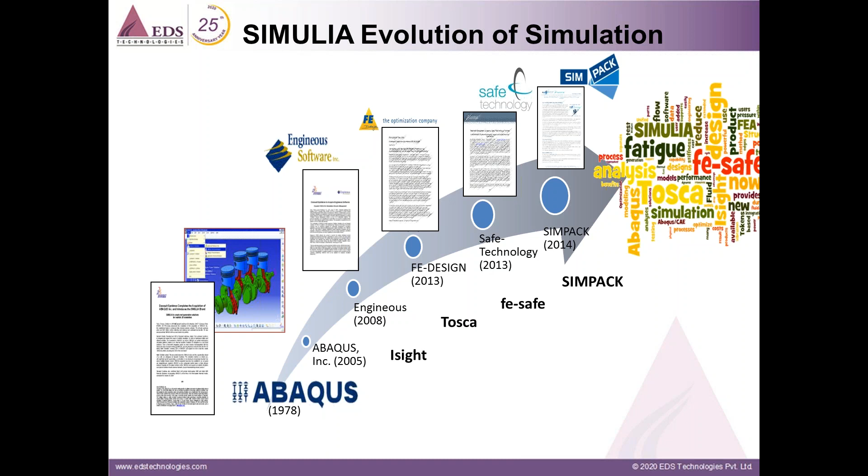Over time, Dassault Systèmes has acquired companies like Isight, Tosca, fe-safe, Simpack, and so on. As the years go by, Dassault Systems is acquiring many simulation software products especially, and making them products under the SIMULIA brand.

Let me begin by introducing SIMULIA. SIMULIA is a Dassault Systems brand that focuses on realistic simulation and is very strong and well positioned to deliver the benefits of realistic simulation technology for the long term to the global user community. It makes virtual testing a standard business practice that improves product performance, reduces physical prototypes, and drives innovation.

Simulia has different ways of licensing its products. For example, right now if you're using a portfolio package or analysis package, it will give you access to Abaqus only. In case you want to use Isight or fe-safe or Tosca, you should have extended packaging. So that's what we're talking about here.

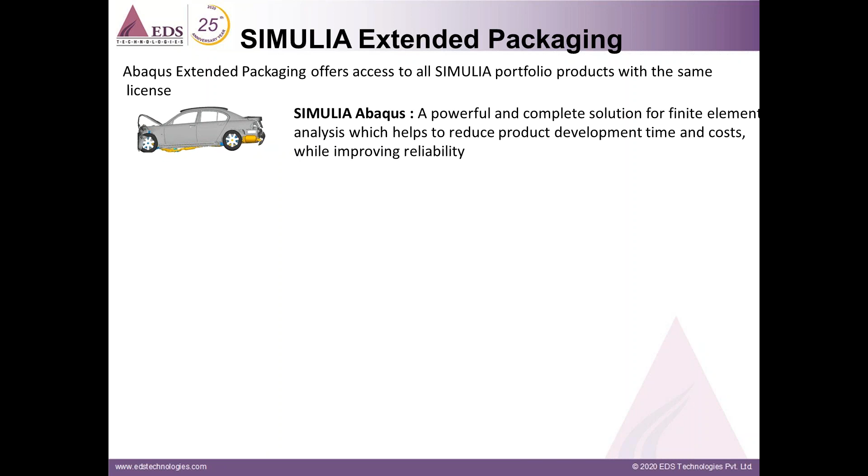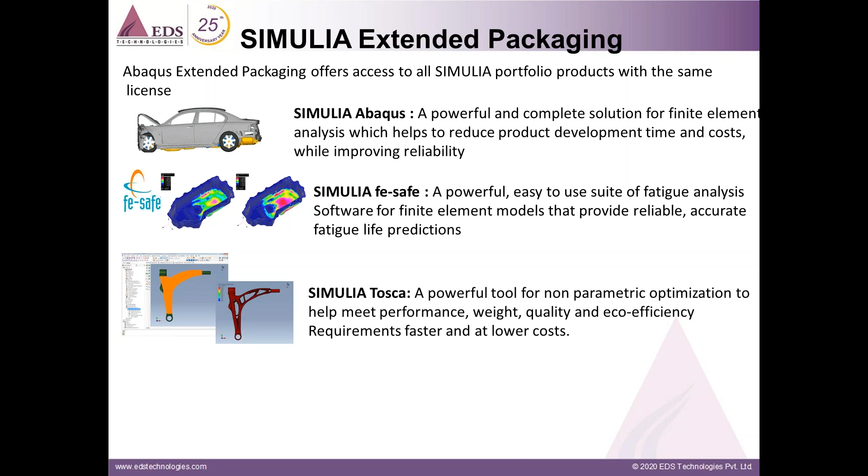First we have Simulia Abaqus, which everyone is probably very familiar with - it's a general purpose finite element software. Then we have FESafe, which is a fatigue calculation solver. Then we have Tosca, which is a non-parametric optimizer. Then we have iSight, which does parametric optimization, but also process automation and many statistical type things. These four softwares together make up the extended packaging.

The intent for Simulia is to have a comprehensive suite of software that will meet all the engineering challenges for a broad range of customers.

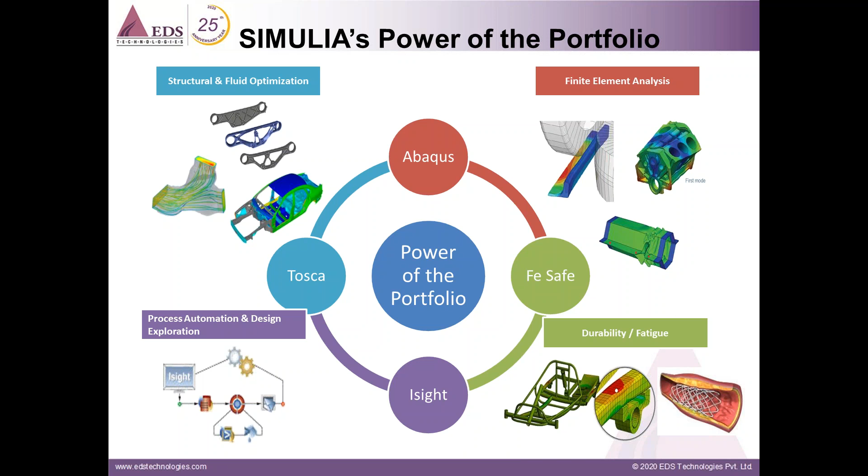Fundamentally, what the software actually does is complement each other depending on your workflow and your products. You may want to use all of them or a couple of them. For example, if you want to do finite element analysis with fatigue, we use Abaqus and FESafe. Finite element analysis and optimization - we have Abaqus, Tosca, and iSight. Or if you want to do automation of your established workflow using iSight, that can be done using Abaqus and iSight.

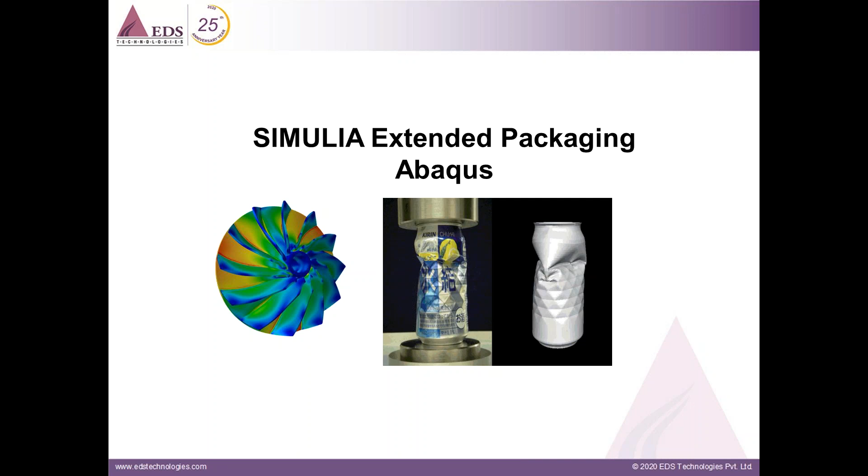First I'll start with Abaqus. I know you're already users of Abaqus, but I want to give some background terminology on a few different products available within the Abaqus portfolio, like solvers and so on.

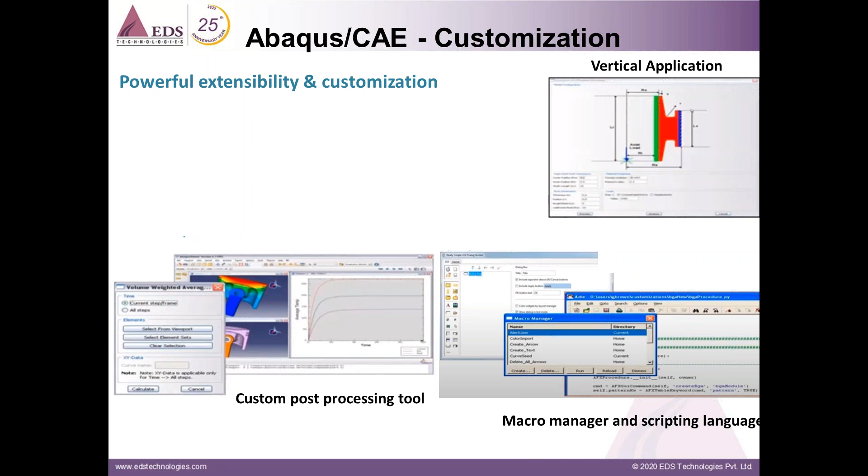In terms of customization, when you're working in Abaqus CAE for pre-processing or post-processing, behind the scenes it's writing journal files or replay files using the Python scripting language, which you can use to build your own scripts. There's also an option within Abaqus CAE to create a macro, which copies the operations you're doing continuously. It's not like writing text and using it - it's like recording a video and using the same video for operations on another model.

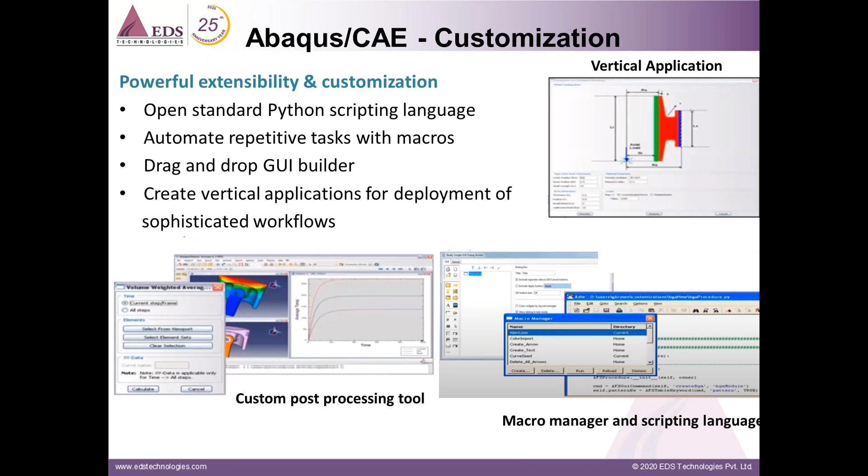We also have a drag and drop GUI builder within Abaqus CAE, where you can build your own interface based on your application. On the top right hand side you can see a vertical application - it's a great deal of customization you can do within CAE.

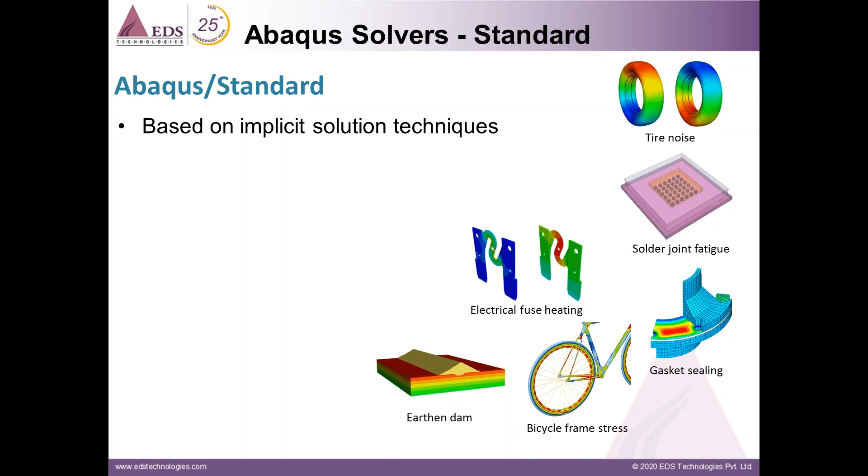Moving on to solver capability, we have two strong solvers within Abaqus that you're already aware of - standard and explicit. Standard is based on implicit solution techniques, typically used in static, quasi-static types of problems, thermal, linear and non-linear analysis, and so on. It's intended to be the solver used for most applicable components or products across a broad range of problems.

We also have what we refer to as a multi-physics procedure, where we couple physics procedures such as thermal and stress, or dynamic stress and displacement. We can also do acoustic analysis, and we have EMAG capability within the standard solver.

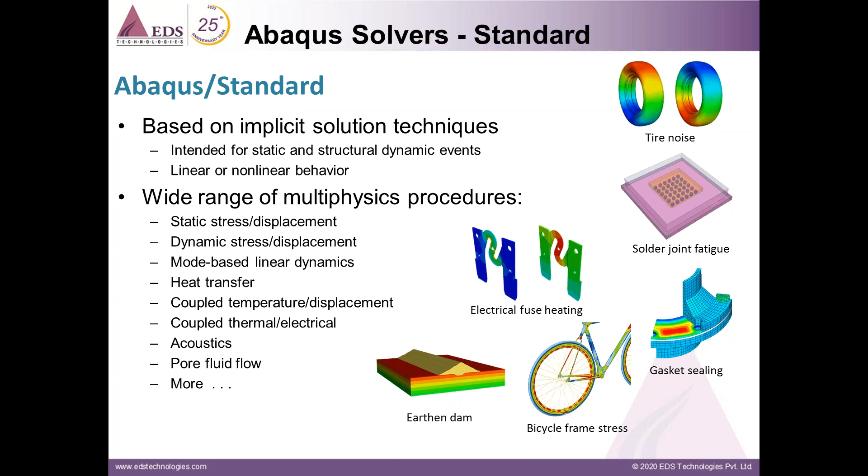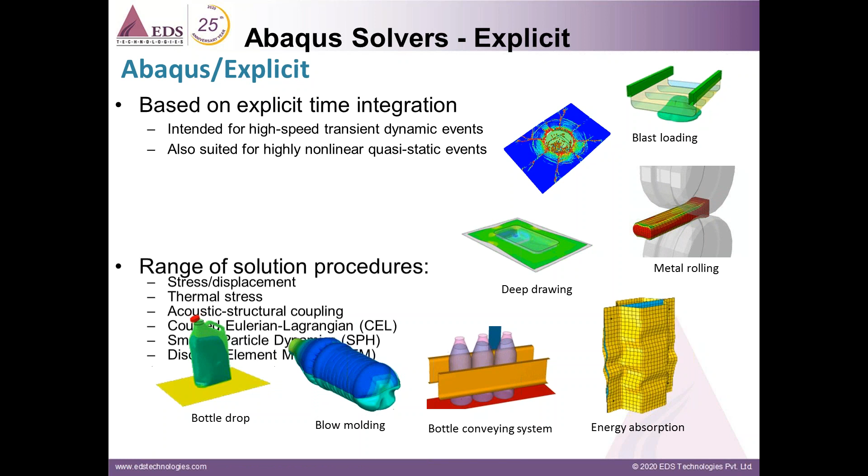Explicit is typically used for dynamic types of things - its main focus is on high-speed transient dynamic events, such as car crash, ballistic impact, or blast. There are additional features within the explicit solver quite useful for a limited subset of problems, such as CEL, SPH, or DEM, which are used in situations where excessive deformation of the mesh is happening.

Going into more detail, you have two different meshing techniques - Lagrangian and Eulerian. Lagrangian is where deformation follows the mesh, whereas in Eulerian we have a static mesh that tracks the displacement and deformations through the mesh. Its applicability comes in problems with extreme deformation, or you can combine Lagrangian and Eulerian together for analysis like airbag deployment, vehicle entering water, blast analysis, or tire hydroplaning.

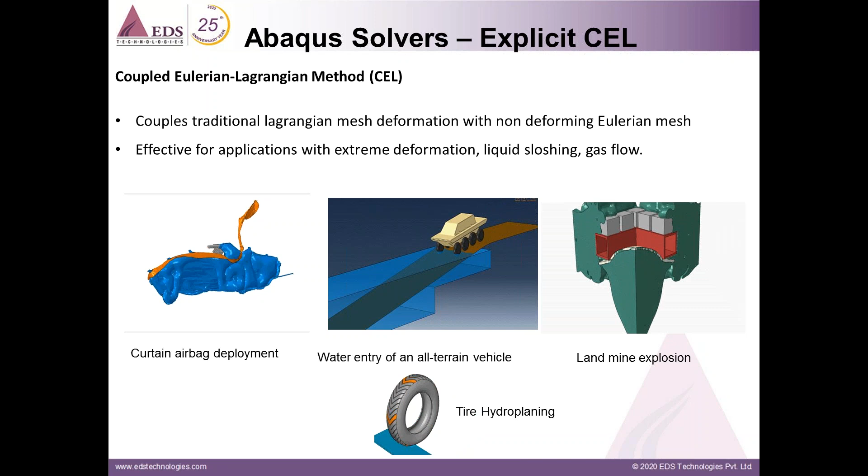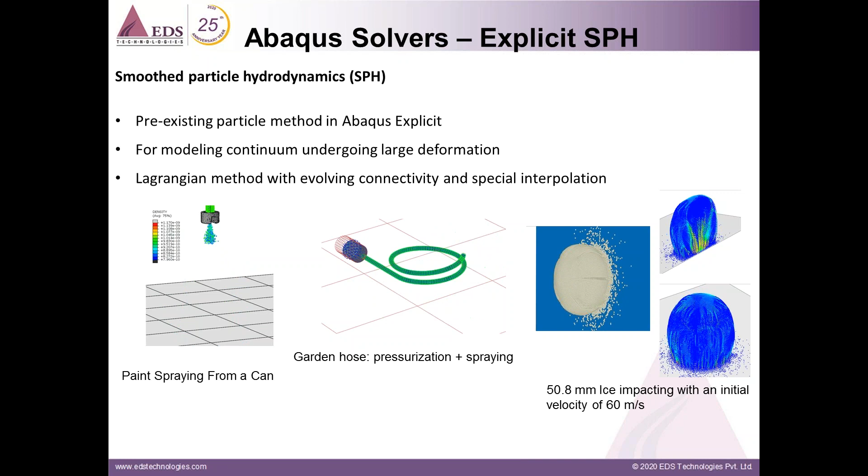Then the other one is SPH. This is essentially where we have particles embedded inside an element, and when the element hits a failure criteria or time-based criteria, the element breaks into these particles. These are good examples of what we have here on the screen.

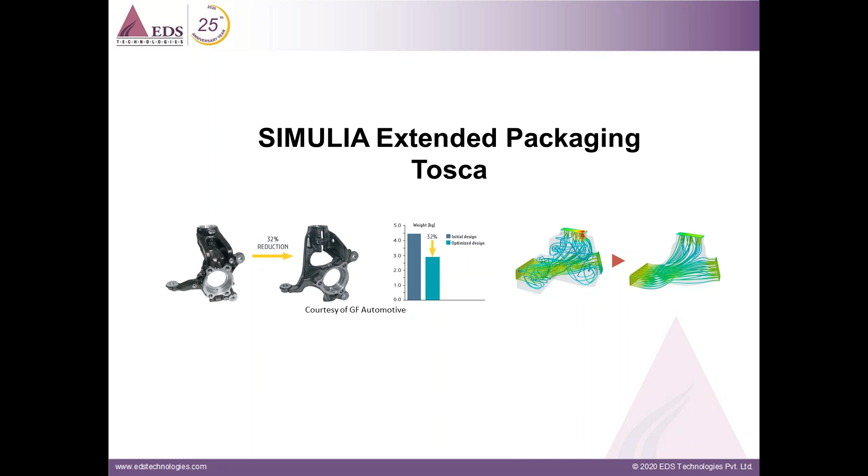That was a brief overview of Abaqus. Now I'm going to talk about Tosca. Before getting into details, there are two different methods to approach optimization - non-parametric optimization and parametric optimization. Tosca uses non-parametric, and Isight uses parametric. There are many other things, but when it does optimization, it uses the parametric method.

The difference between the two is - when I talk about parametric optimization, the parameters are things like, for example in terms of a car, thickness, dimensions, fillet areas, or radius kind of things. It's not limited to just geometry, but also considers things like coefficient of friction or different material properties - all these we consider as parametric type of things. Whereas in Tosca, it doesn't look at the problem that way - it just considers the design space and then adds or removes material based on the objectives and criteria.

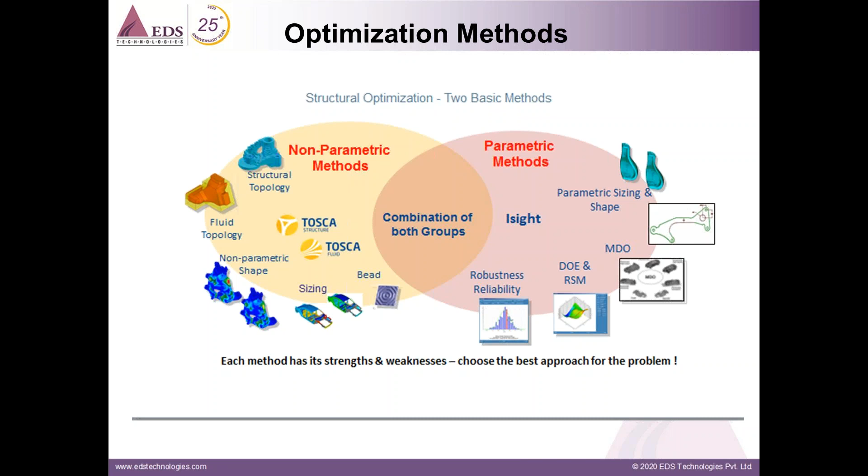Within Tosca, there is a Tosca Fluid module used to minimize pressure drop, like in HVAC systems or the AC inside a car. We also have Tosca Structure within Tosca, which includes modules like the topology module, used to maximize stiffness or minimize weight.

And we have a sizing module to reduce mass by optimizing sheet thicknesses. We have shape optimization, which is used to reduce localized stresses and increase durability. And we have bead optimization, generally used on sheet metal components to increase stiffness or eigenfrequencies of sheet metal structures.

And as I told you, we also have a module called fluid topology optimization, which is generally used in HVAC systems to minimize pressure drop.

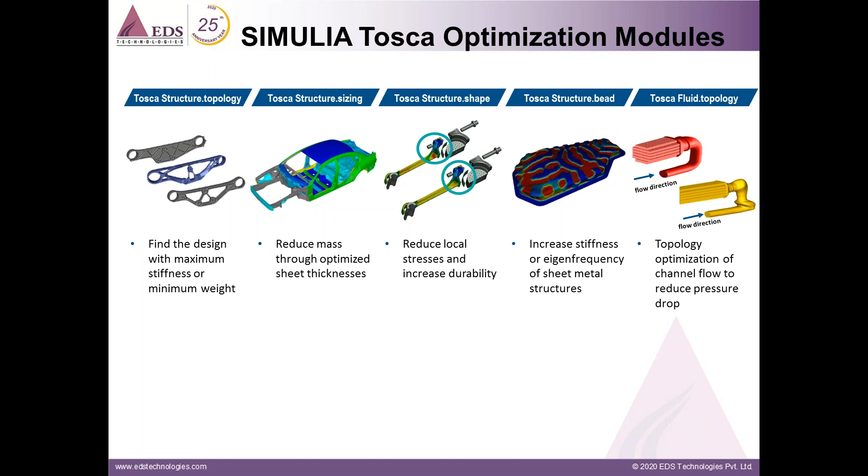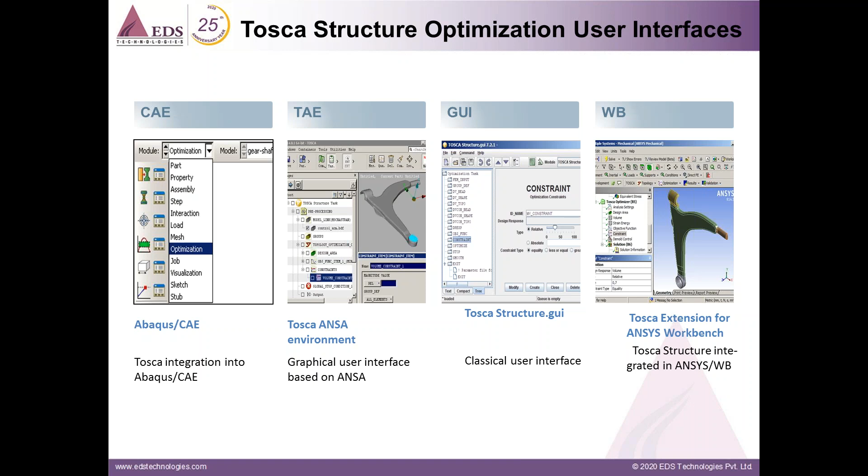Tosca is available as a plugin in other software, and these are the user interfaces. In Abaqus CAE itself, there is a separate module called the optimization module which we can use for optimization. It's also available as a plugin for both ANSYS Workbench and ANSA, where you can set up your problem and execute the optimization process.

Here comes the workflow of Tosca structure, where first we created a design space of our finite element model and submitted it for optimization. Based on the constraints, objective function, and design space you have created and selected, it has removed material, and this is the resulting shape.

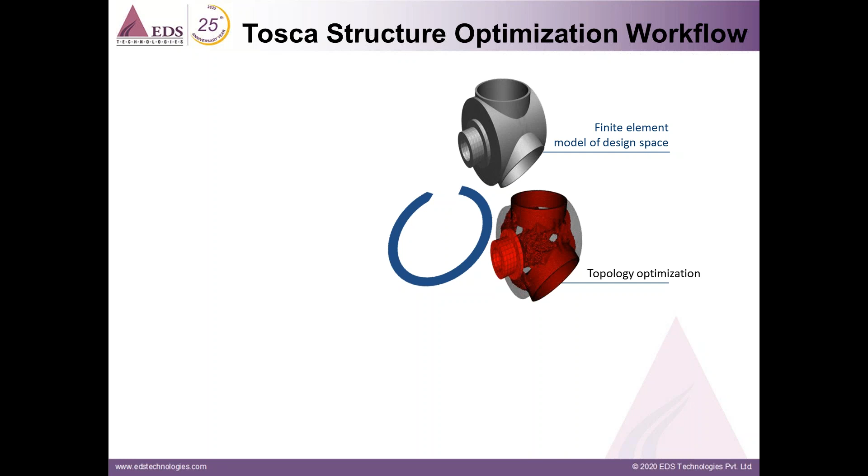After this, we export and perform a smoothing operation on the component to validate the file. Then we did a validation run with the same boundary and loading conditions, and identified high stresses in some locations.

Based on that, we performed a shape optimization to reduce the localized stresses. If you reduce localized stresses, the life of the component will increase.

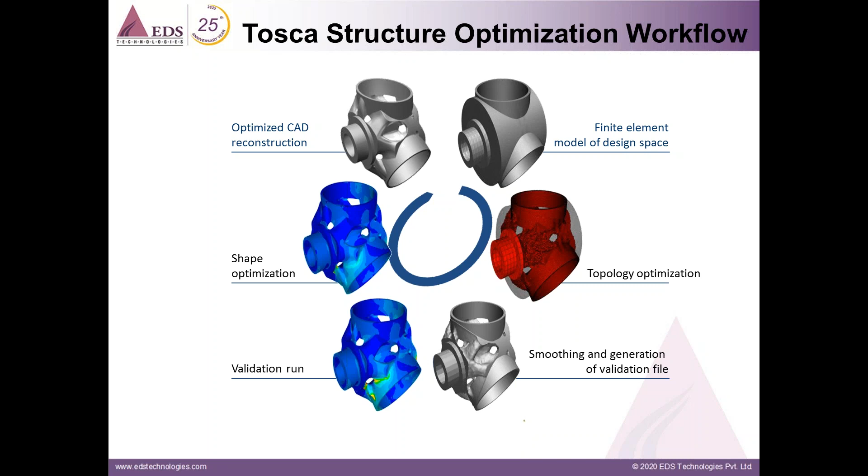After that, we exported the model into CAD in IGS format, and that's where your CAD engineer comes into the picture, makes some modifications, and gives you the final part. So you can see the final optimized part.

So here is another example: a stabilizer bar link from Audi.

Initially they had a design which worked perfectly, but when they changed the configuration of this component, they ended up seeing some fatigue cracks on it. So they decided they had to reduce the stresses by 25% to pass the fatigue life.

Essentially they had one radius parameter, only one parameter, and they were looking to change this one parameter. Initially they ran it manually, doing FEA model iterations by changing the radius to achieve the 25% reduction in stresses, but couldn't achieve it.

Finally they learned about Tosca, which has a shape optimization module. It's a free form of geometry used in Tosca, and it doesn't consider any parameter like radius. By using Tosca, they actually managed to get a 30% reduction in stresses.

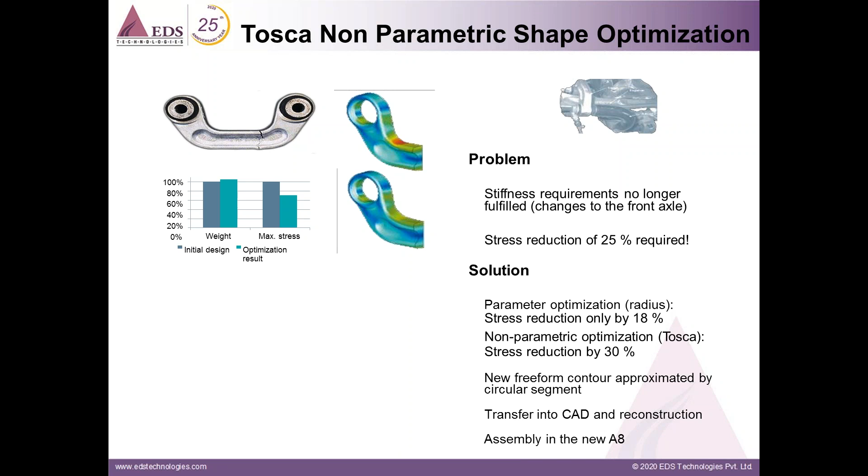In contrast, with the parametric optimization, they achieved only an 18% reduction in stresses. So that's a good case study I wanted to show you.

Now moving on to fe-safe. fe-safe is actually a UK company established in the 1990s, and later in 2013 it got acquired by DS. It's a technical leader in durability by design, and the first commercial software to come up with multi-axis strain-based methods.

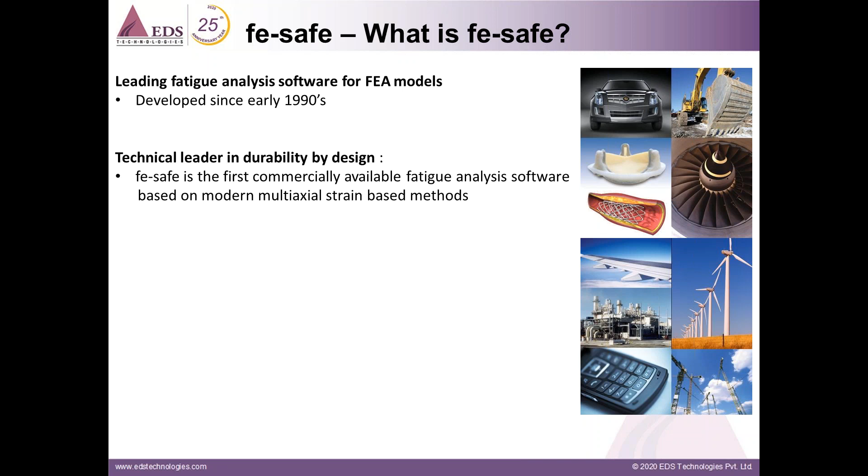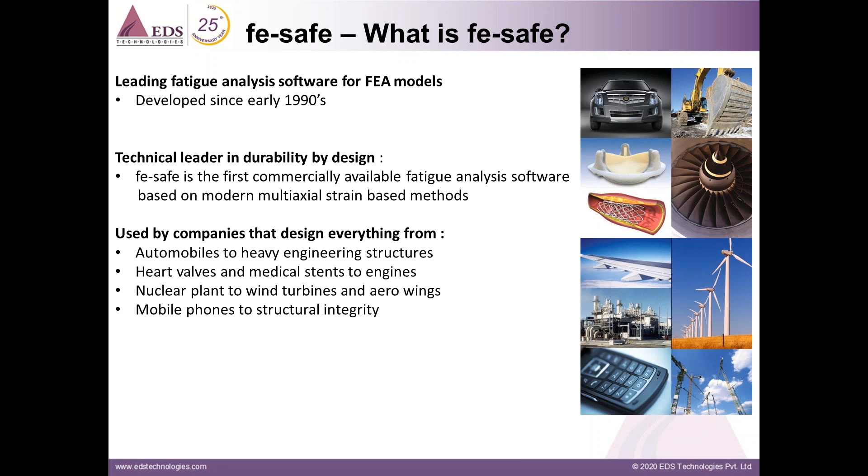It's the first software in the world to come up with this method, and it is being used everywhere. It's used not only in automobiles but also in heavy engineering structures, and in life sciences to estimate the life of a stent or a heart valve, as well as in nuclear plants, wind turbines, and aero wings. So all industry verticals use this fatigue software to know the life of the component.

So first, let's understand the workflow in fe-safe. Again, it is a very flexible software, very easy to use and learn, because the workflow looks very simple. The only thing needed is that the data should be available to you, like the loading data or the material SN curve data.

So here we can see on the screen, first the CAD designer gives a CAD model to the design engineer, who does analysis in ANSYS, Abaqus, or Nastran, and later transfers the results like stresses, strains, temperature, displacement, and reaction forces to fe-safe, which is where we give a loading extracted from experimental testing using accelerometers or strain gauge sensors.

We capture the load cycles and give them as input in fe-safe, and along with that we also provide SN curve data of that material, and run a fatigue calculation. Based on the results, you can decide whether to sign off the test or redesign the product. So this is a simple workflow wherein you can quickly set up the problem and get the results.

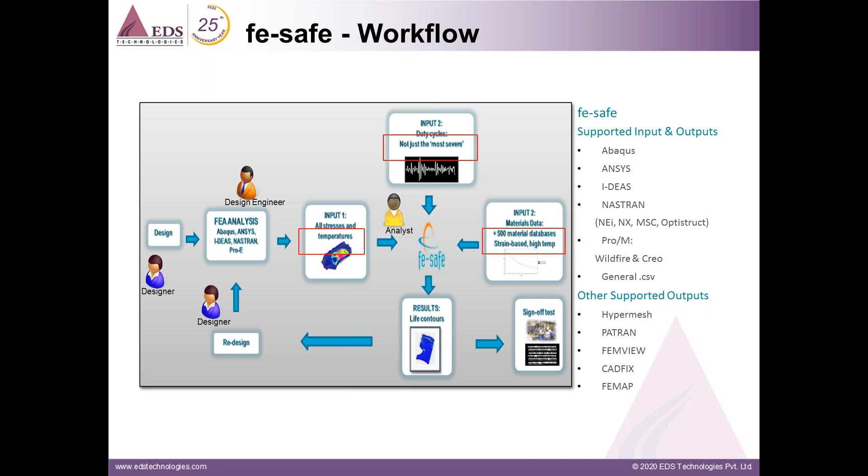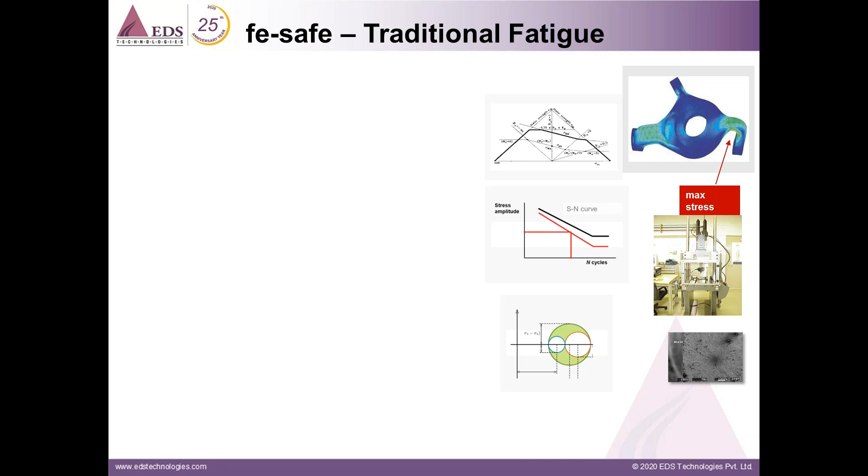So many companies here in India use advanced finite element analysis to calculate design stresses, but fatigue analysis is often still done by manually picking stress points from a spreadsheet and doing hand calculations, or using an Excel sheet and so on.

These types of methods and hand calculations are inadequate for anything but the simplest fatigue scenarios. With these methods, too much is left to user interpretation - it is the user who has to interpret the results. It's easy to miss failure locations by focusing on the wrong section of a model, and it's impossible to consider all conditions, alternatives, and variables when doing these traditional calculations.

Fatigue tests are required, but what we observe is that most people try to introduce fatigue calculations at the initial project stage. Actually, fatigue tests should always be carried out at the end of the project in order to save time or save on experimental testing setup and so on.

So it is always recommended to do it at the end, during your validation or final stage of validation, so that you can save time and money, because setting up your fatigue test is more expensive and more time consuming.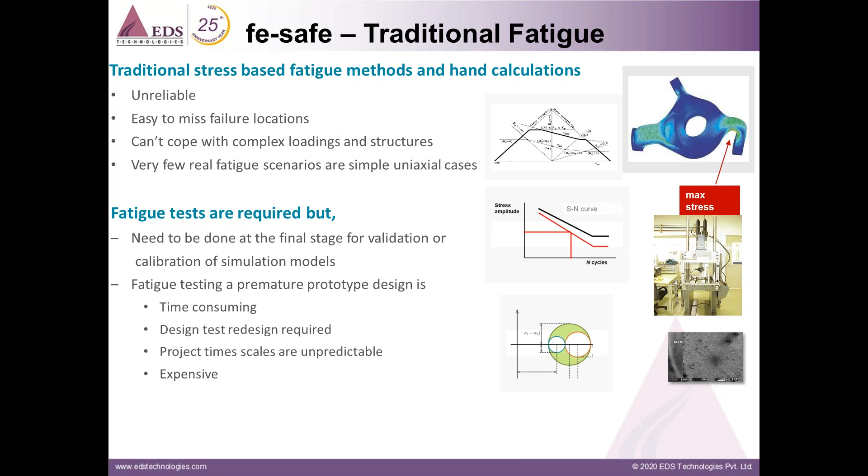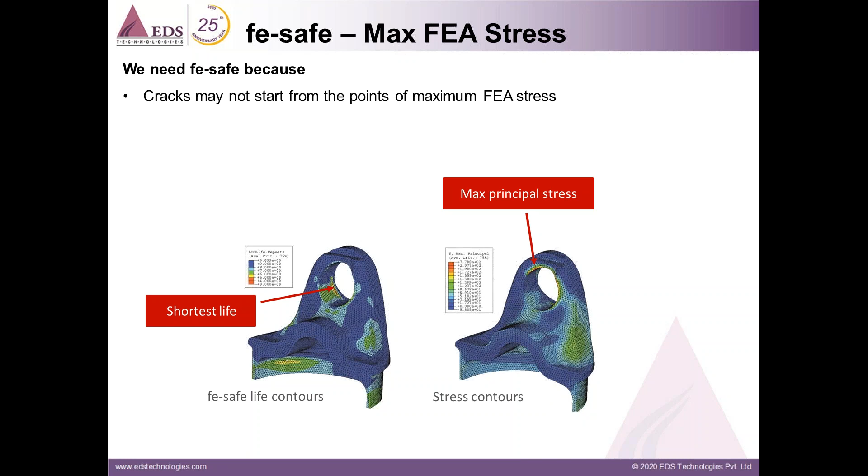Another thing to be concerned about is that cracks may not start from the point where the maximum FEA stresses occur. We have a good example from Dana Automotive. They have a part called a drive shaft assembly joint.

When they did the analysis, the maximum principal stresses were on the exterior. You can see on the screen the maximum principal stresses are on the exterior side, but the shortest fatigue life is on the inside of the component. This was proven out by physical testing as well.

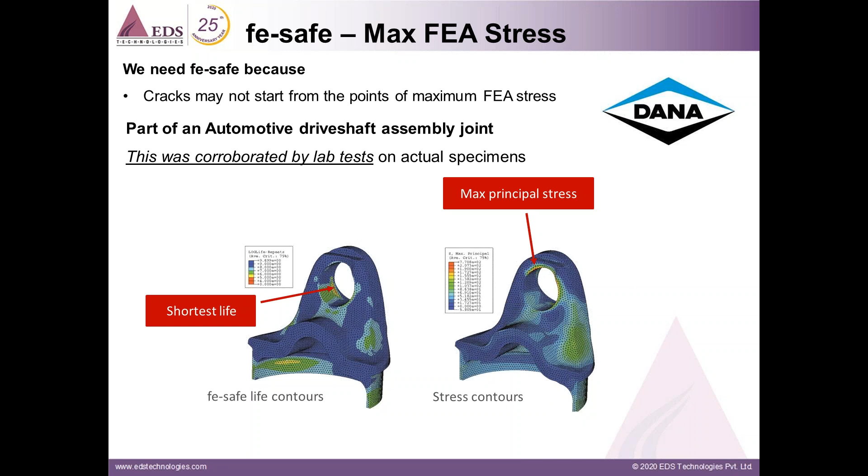Here is another thing: crack initiation depends on loading sequence. We have another testimonial from Hyundai - it's a part called the steering knuckle, and we have different load cases here.

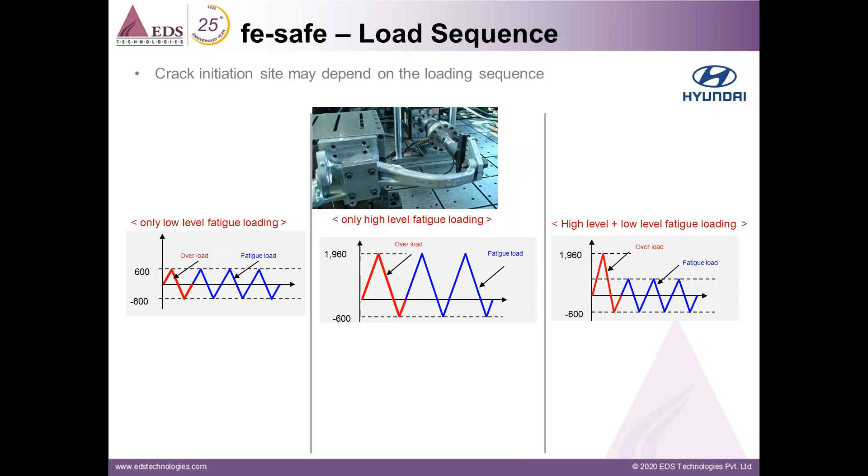We have a low level fatigue case - you can see on the screen, left bottom side, the prediction is just around the bolt area, which is pretty close to where the component actually failed in reality. Then they did a high level fatigue case, and again the prediction is similar to what we see in reality.

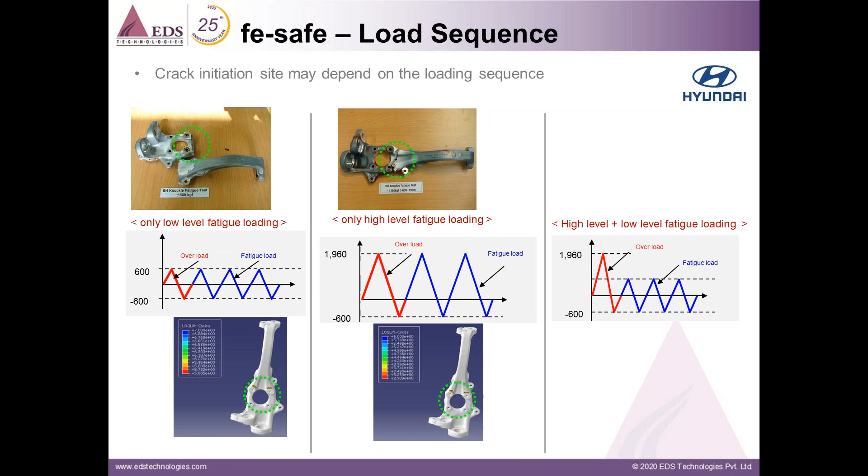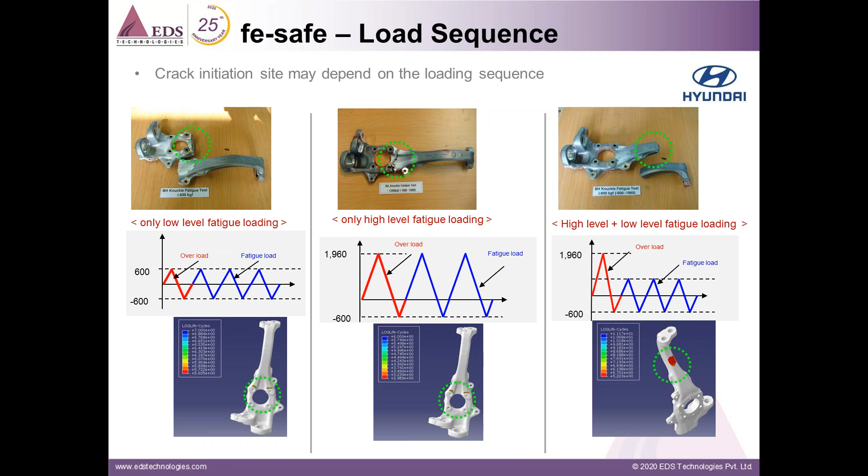But when you combine these two load cases, you end up with a fatigue crack in a different location. Again, this is what fe-safe predicted, and this is what happened in the physical test as well. So loading sequence is also a concern here when you do fatigue calculations.

In fe-safe, these are the three add-on modules available with us. One is the Verity module, used to calculate the fatigue life of welded joints. We also have fe-safe TURBOlife from AMEC, used to estimate the life of thermomechanical components like pistons, exhaust components, exhaust manifolds, or turbochargers. Similarly, we have fe-safe Rubber, used to estimate the life of elastomers and rubber components. So these are the three add-on modules to estimate fatigue life.

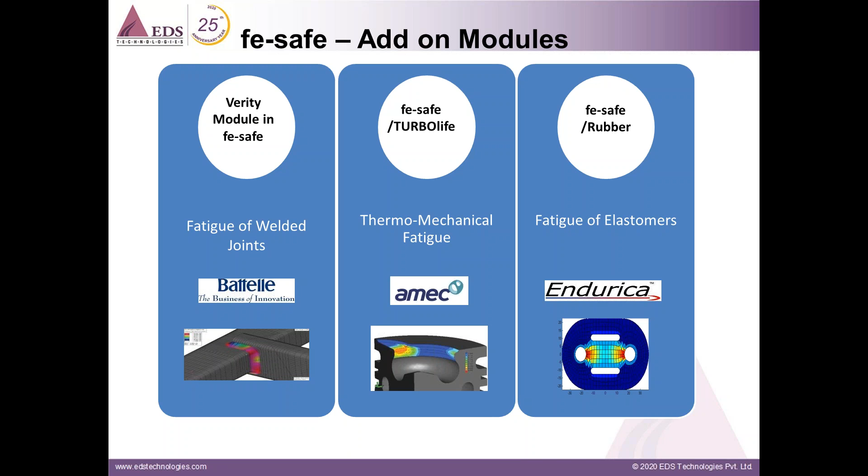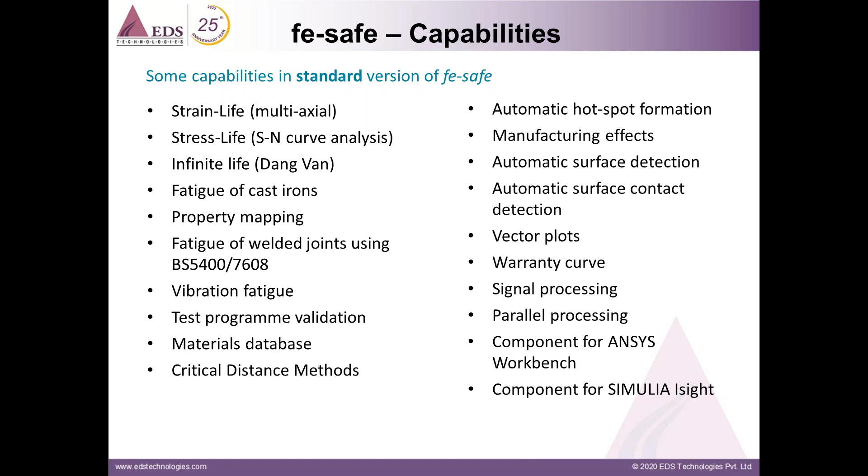And these are some of the capabilities in the standard version of fe-safe. We have the strain life method, stress life method, and a material database. fe-safe has a 500 plus material database, including cast iron, which is already proven and authorized by Material Society, and this database also consists of SN curve diagrams.

So now moving on to iSight. To begin with, what is iSight? iSight is essentially a toolkit that helps you capture repetitive tasks and automate them by creating what we call a SimFlow, simulation workflow in iSight. Let me try to explain this way.

Each one of us has our own way of working. We have many tools that help us accomplish our day-to-day tasks. We might be using CAD tools like CATIA, SolidWorks, utility tools like Calculator, Excel, Word document, or simulation tools like Abaqus, ANSYS, Nastran. So there are a couple of tools that we use at work.

What iSight does for you is bring the integration and execution of these tools under a common platform, and it brings automation so that these tools can be driven in an automated fashion, passing data from one tool to another seamlessly without the need for any human intervention.

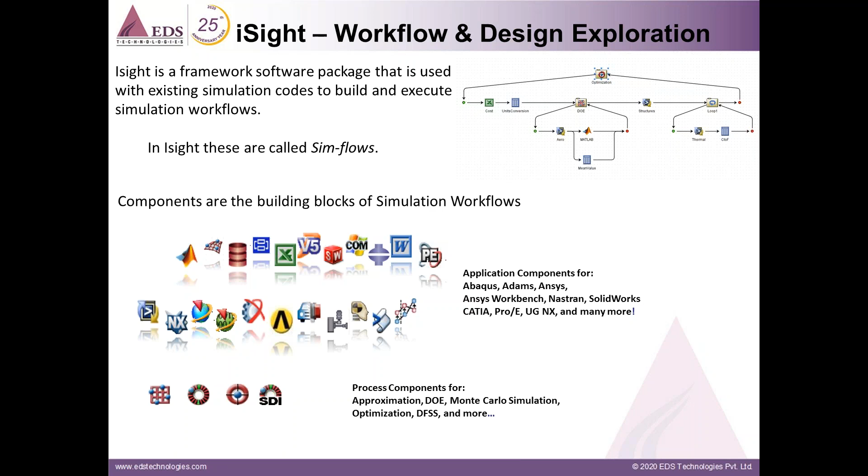iSight can also be used for very effective data analysis, like engineering data analysis, which is extracting non-trivial information out of hundreds or thousands of data sets. There are a number of tools in iSight that help you understand those correlations when you read hundreds of parameters.

As I told you earlier, iSight is a parametric optimization software, and we consider parameters like length, width, radius, angle, and so on. Using those parameters, we try to come up with an optimized design. So you'll have hundreds and thousands of data points.

We have many tools available in post-processing in iSight, so we have tools like a Pareto chart, or probability distribution graph, cumulative distribution graph, that help you understand which parameters are strongly correlated or weakly correlated to each other.

We also have response surfaces that you can visualize in 3D and 2D to see how a response surface for certain parameter interactions looks like. If you want to look at how ODB, the results file from Abaqus for a particular design, looks like, you can invoke a viewer from inside iSight. All of this is available inside the data analysis tool.

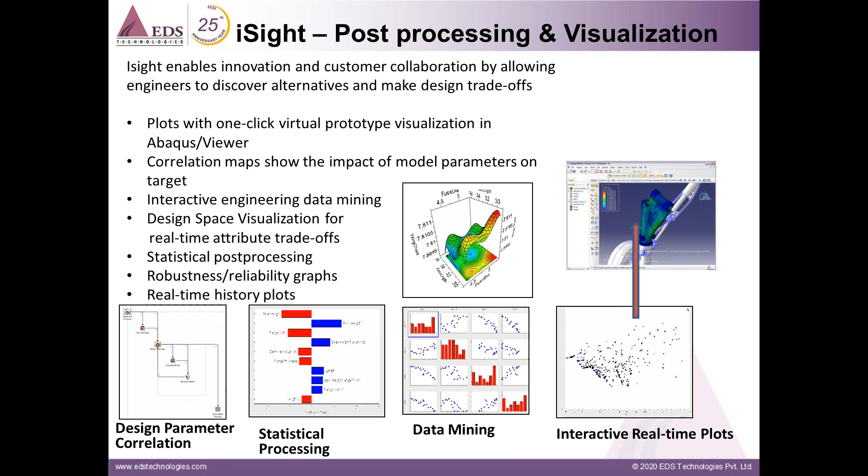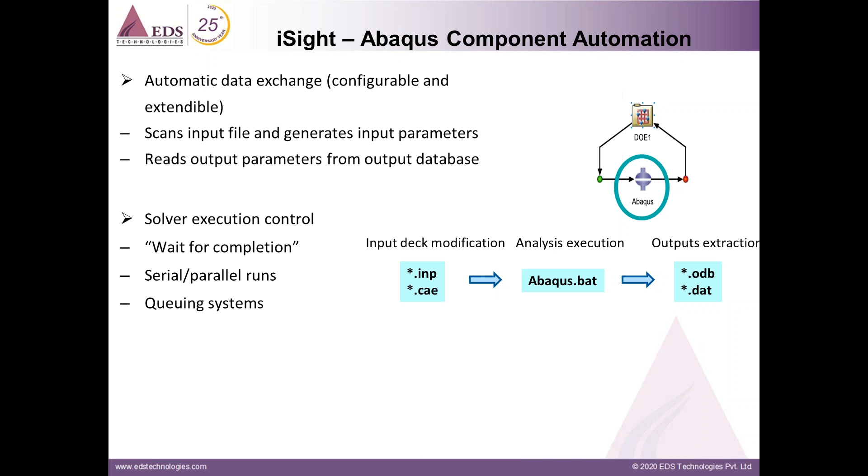Here's a good example, again using the Abaqus component. As I told you, you can automate your analysis and your workflows. A workflow which is already established and proven, you can make into a workflow here, and you can do a design of experiment study, and also do an optimization study with approximation study and so on. This is how we create a simple workflow using the Abaqus component, and we do the optimization of our component.

So how exactly do customers get there, or how do they achieve product performance or reliability? How do they reach their goals using what we call the automated design strategies that are embedded into iSight? Typically, what you see here is a traditional design optimization that you may have done before or heard of, where we start with an initial design point.

You can see that initial design point highlighted, and then we loop our design through an optimization algorithm to find an optimal design, or to meet our requirements. The optimization algorithm will find the most optimal point here, and if you notice, it is very close to what we call a constraint boundary. Most engineering problems that we deal with here are highly constrained, and they are bound to some kind of constraint that we deal with.

Sometimes they are constrained - I need to manufacture a product so stresses need to be within the bounds, or deflection cannot be more than so and so. These are the kind of constraints that we deal with.

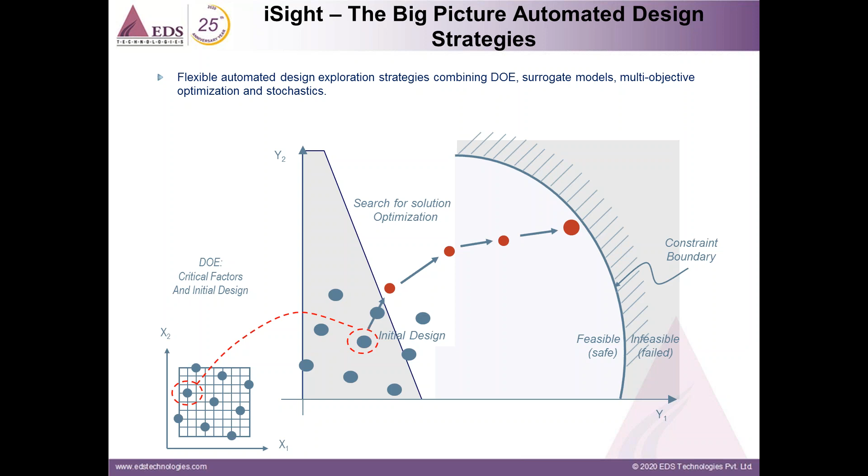In this process, the optimization algorithm will work to try to find the best solution without going outside the constraint boundary, because if it goes beyond the boundary, it will fall into an infeasible design space, and we cannot use those parameters for our design. So this is where it finds you the most optimal solution.

But if you look at this point, and start taking into account things like manufacturability, tolerances in material property, or any other kind of variability in your design process, you will notice that a lot of these parts will fail because they lie outside the constrained boundary.

So now in iSight, you can add additional goals to your optimization that bring this design away from a critical edge, so that not only is the design optimized but it also takes into account all the variabilities or randomness that exist in your design. So all the variations of designs are also optimized, bringing your design away from the critical edge by reducing process variability.

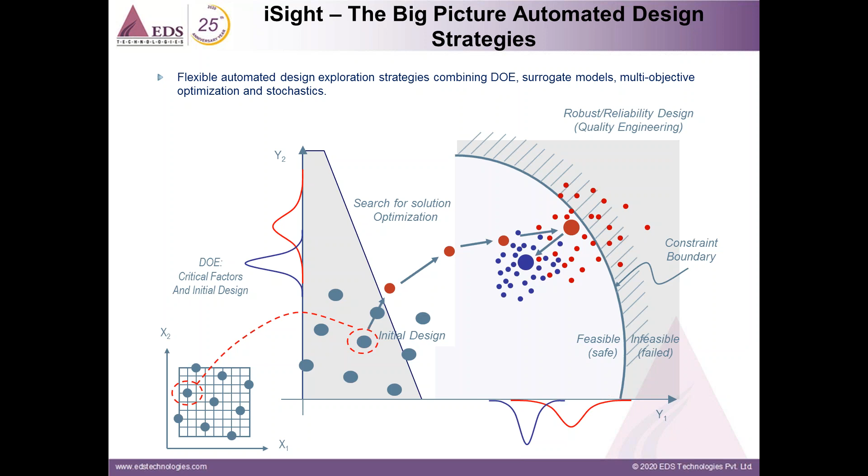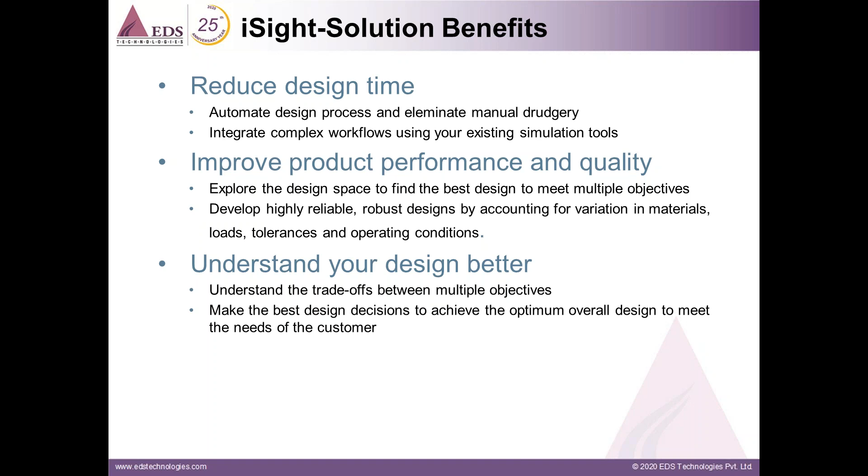So this is how the algorithm works in iSight. These are the benefits you get from iSight, wherein you can reduce your design time by automating the design process. You can improve your product performance and quality by exploring new design spaces or coming up with robust designs. And you can understand your design better by doing a trade-off between multiple objectives and make your design decisions to achieve an optimal design that meets the needs of the customer.

Now moving on to licensing. The power portfolio offers a unified licensing with two components. One is QAX, a trigram that gives access to GUIs of Abaqus CAE, iSight, FESafe, and Tosca. The second is QXT, a trigram for solver tokens. These are meant for computational usage only - we cannot use them to open a GUI for pre-processing and post-processing.

Why? Because right now you're using portfolio tokens which can be used for all three - pre-processing, solving, and post-processing. But in this extended packaging, QXT tokens are solver tokens used only for solving, not for opening any GUI for pre-processing and post-processing. So we have QAX, which gives you access to the GUI where you can do pre and post processing. Tokens under this trigram can be used to execute your FESafe, Abaqus, Tosca, or iSight jobs - the same tokens can be used for all solvers. That's the beauty of this extended packaging.

So how many tokens do you need for each job? For Abaqus and iSight, a very basic configuration of iSight using 5 solver tokens, you would need only one GUI as well. For FESafe, you need 8 tokens - one seat minimum. For Tosca, you require 8 tokens if you're using it with Abaqus, but if you're using Tosca with Ansys, then you need 9 tokens. And if you want to combine everything together, you need a minimum of 13 tokens.